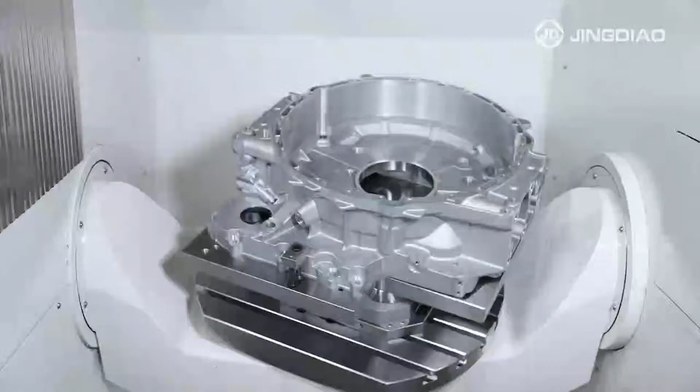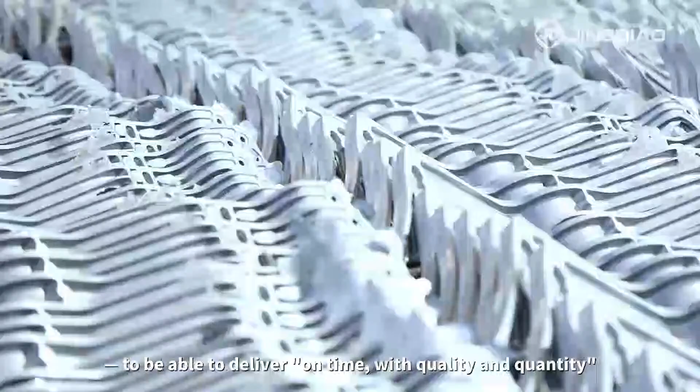As a manufacturing enterprise, Beijing Jingdiao is not an exception. Over the past 30 years since its establishment, it has always insisted that product development should return to the original position of a machine tool, a tool used for machining parts, and that it should focus on the original needs of customers, to be able to deliver on time, with quality and quantity. By providing customers with high-precision CNC machine tools and comprehensive CNC engineering services, it promotes the better development of both customers and the whole industry.

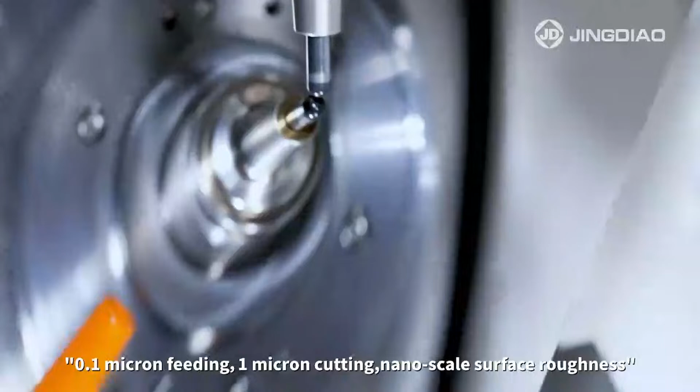Jingdiao precision CNC machine tools can stably achieve 0.1 micron feeding, 1 micron cutting, nanoscale surface roughness, to meet the needs of micron-level precision parts processing. Jingdiao CNC engineering services are based on Jingdiao's unique in-machine automation working mode, and provide mature CNC engineering solutions according to the needs of customers inside the industry.

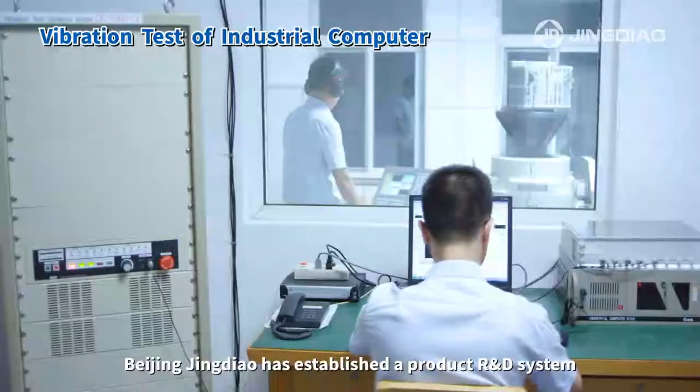In order to achieve the above goals, over the past 3 decades, Beijing Jingdiao has established a product R&D system that is close to the needs of customers, independently completing the R&D of key core components and core technologies of machine tools, and realizing the integration of electromechanical software.

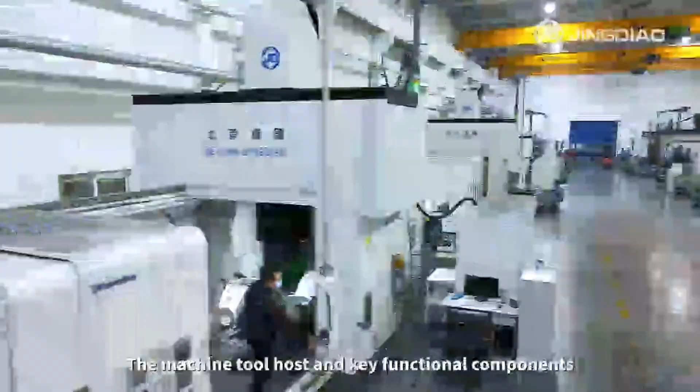A large-scale production system with lean manufacturing capabilities has been established, with a precision CNC machine tool production base of over 500,000 square meters. The machine tool host and key functional components are produced by self-developed equipment, with manufacturing and assembly accuracy controlled at the micron level.

We have helped customers make good use of the application technology service system of Jingdiao machines, established a technical service team of over 1,200 people, and provided professional, timely, and efficient technical services to customers at home and abroad.

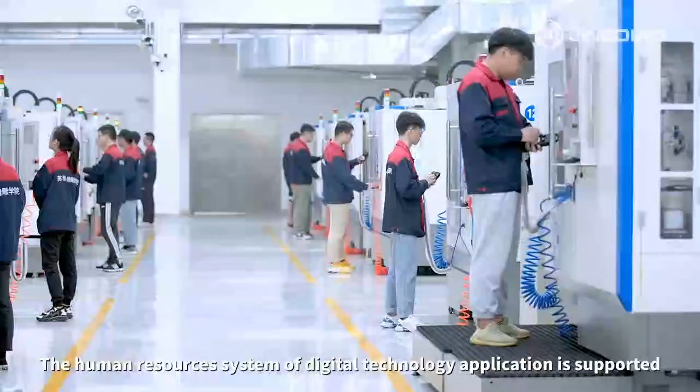The human resources system of digital technology application is supported, and accumulated over 20,000 talents who master digital technology to the industry through independent education, school enterprise cooperation, and hosting industry competitions.

Nowadays, Jingdiao high-speed machining centers have achieved large-scale application in the Chinese machining industry, helping manufacturing enterprises truly achieve micrometer-level parts large-scale and efficient processing.

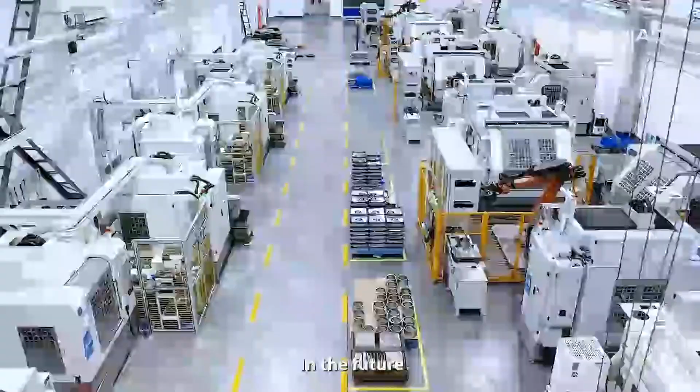Mountains and seas are not really barriers for sincere cooperation. In the future, we hope to work together with our European manufacturing partners to contribute our share to the development of the industry.

Let's connect the world with precision machining. Join hands to create a brand new future.

Connecting the world with precision machining.

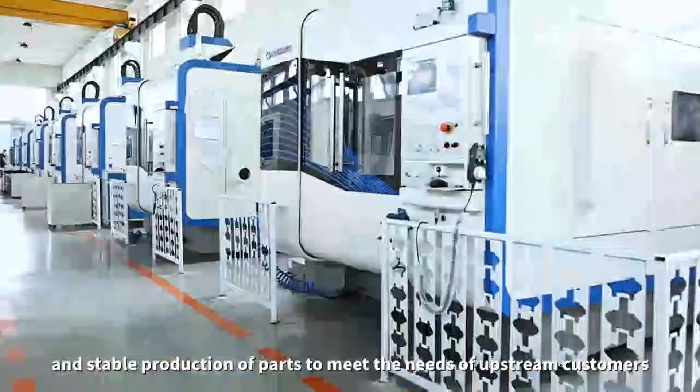In every aspect of our daily lives, products of all kinds continue to improve the quality of life. And these products are made up of parts, and parts cannot be created without the manufacturing industry. Many companies in the manufacturing industry have been working tirelessly to ensure the accurate, efficient, and stable production of parts to meet the needs of upstream customers, maintain supply chain stability and ensure product performance and quality.

As a manufacturing enterprise, Beijing Jingdiao is not an exception. Over the past 30 years since its establishment, it has always insisted that product development should return to the original position of a machine tool, a tool used for machining parts, and that it should focus on the original needs of customers, to be able to deliver on time, with quality and quantity. By providing customers with high-precision CNC machine tools and comprehensive CNC engineering services, it promotes the better development of both customers and the whole industry.

Jingdiao precision CNC machine tools can stably achieve 0.1 micron feeding, 1 micron cutting, nanoscale surface roughness, to meet the needs of micron-level precision parts processing. Jingdiao CNC engineering services are based on Jingdiao's unique in-machine automation working mode, and provide mature CNC engineering solutions according to the needs of customers inside the industry.

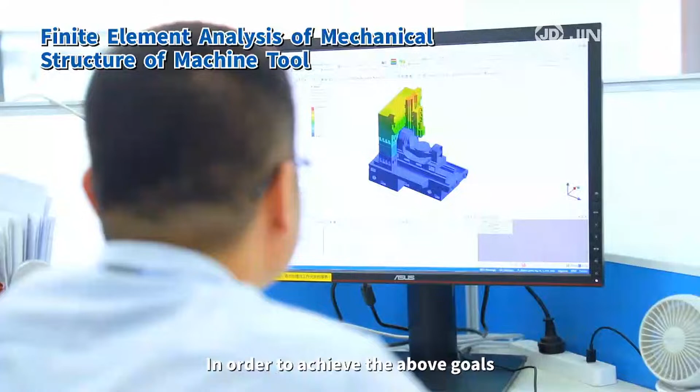In order to achieve the above goals, over the past 3 decades, Beijing Jingdiao has established a product R&D system that is close to the needs of customers, independently completing the R&D of key core components and core technologies of machine tools, and realizing the integration of electromechanical software.

A large-scale production system with lean manufacturing capabilities has been established, with a precision CNC machine tool production base of over 500,000 square meters. The machine tool host and key functional components are produced by self-developed equipment, with manufacturing and assembly accuracy controlled at the micron level.

We have helped customers make good use of the application technology service system of Jingdiao machines, established a technical service team of over 1,200 people, and provided professional, timely, and efficient technical services to customers at home and abroad.

The human resources system of digital technology application is supported, and accumulated over 20,000 talents who master digital technology to the industry through independent education, school enterprise cooperation, and hosting industry competitions.

Nowadays, Jingdiao high-speed machining centers have achieved large-scale application in the Chinese machining industry, helping manufacturing enterprises truly achieve micrometer-level parts large-scale and efficient processing. Mountains and seas are not really barriers for sincere cooperation. In the future, we hope to work together with our European manufacturing partners to contribute our share to the development of the industry.

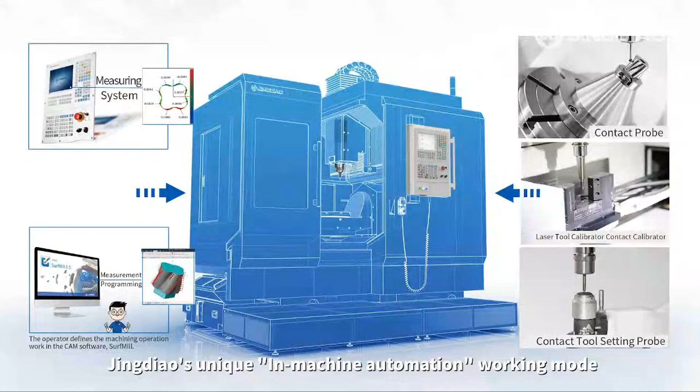Jingdiao precision CNC machine tools can stably achieve 0.1 micron feeding, 1 micron cutting, nanoscale surface roughness, to meet the needs of micron-level precision parts processing. Jingdiao CNC engineering services are based on Jingdiao's unique in-machine automation working mode and provide mature CNC engineering solutions according to the needs of customers inside the industry.

In order to achieve the above goals, over the past 3 decades, Beijing Jingdiao has established a product R&D system that is close to the needs of customers, independently completing the R&D of key core components and core technologies of machine tools, and realizing the integration of electromechanical software.

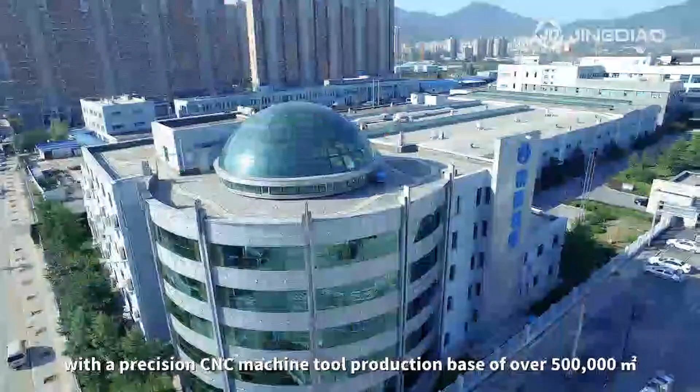A large-scale production system with lean manufacturing capabilities has been established, with a precision CNC machine tool production base of over 500,000 square meters. The machine tool host and key functional components are produced by self-developed equipment, with manufacturing and assembly accuracy controlled at the micron level.

We have helped customers make good use of the application technology service system of Jingdiao machines, established a technical service team of over 1,200 people, and provided professional, timely, and efficient technical services to customers at home and abroad.

The human resources system of digital technology application is supported, and we have accumulated over 20,000 talents who master digital technology for the industry through independent education, school enterprise cooperation, and hosting industry competitions.

Nowadays, Jingdiao high-speed machining centers have achieved large-scale application in the Chinese machining industry, helping manufacturing enterprises.

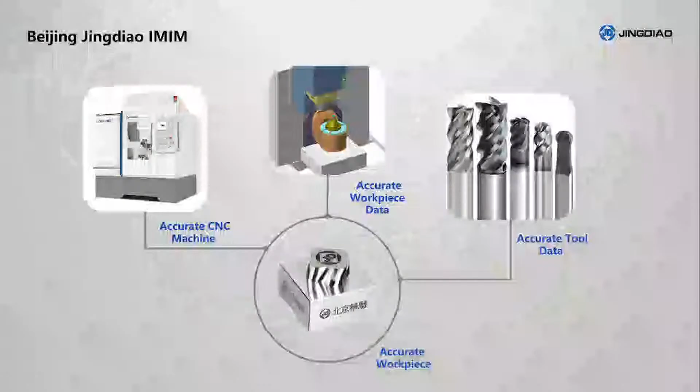In order to machine such high precision parts, especially as we saw, these micron parts are standardized machined. To some extent, we need a high precision CNC machine tool, of course, and then we also need to make sure that the workpiece and the cutting tools are all accurate, as well as the whole process.

However, there are many factors that may lead to the accuracy going out of tolerance, such as workpiece deviation, inaccurate raw part allowance, and tool size deviation and tool wear.

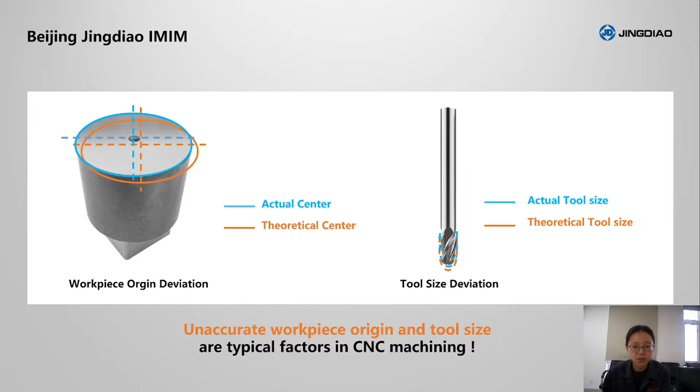Among all these factors, workpiece origin deviation and tool size deviation are so common yet have such obvious influence on the machining results.

To eliminate the deviation, we usually use the following methods. For example, we use a dial indicator to align the part, or some machines provide MDI functions to set the origin, usually for simple shapes such as rectangular and circle. We may also use trial cut to set the tool. Some machines provide MDI functions to set the length or radius of the cutting tools, but not the profile of the cutting tool.

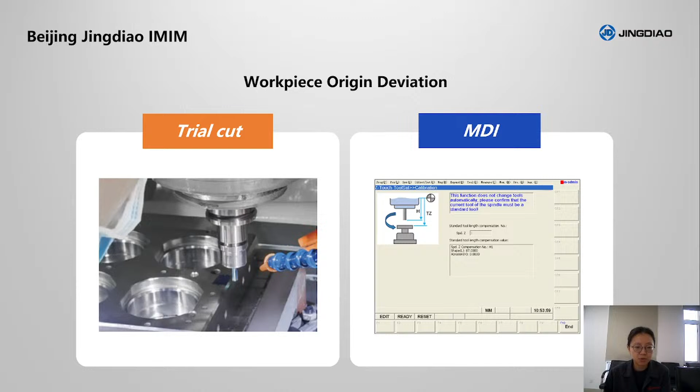So is there a possible solution that we can obtain the data of workpiece and tools fast, accurately, intelligently, automatically, and compensate the deviation intelligently in not only 3-axis machine tools, but also 5-axis?

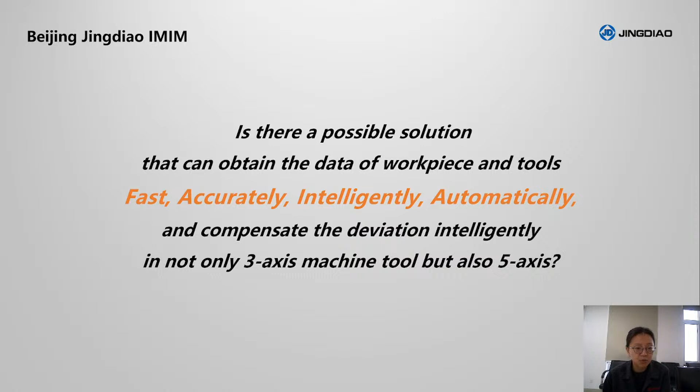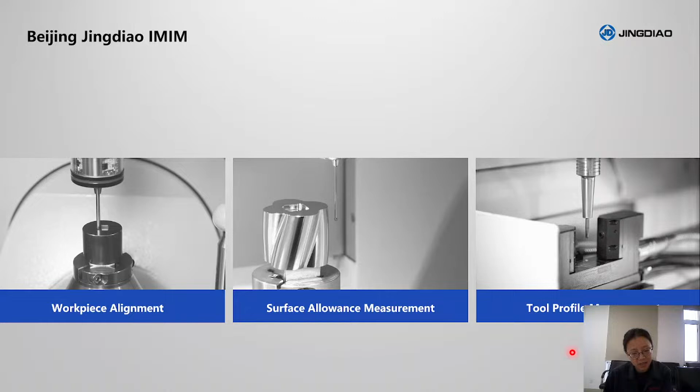The parts we saw in the video at the beginning of our online seminar used IMIM to set the origin automatically and measure the surface allowance and compensate the ball end cutting tool profile intelligently. Besides this part, Jingdiao IMIM is widely used in machining all kinds of parts. Today, I will use several examples to explain what we can do with IMIM in precision machining.

So first, let's see what IMIM can do in building precise coordinate parts in 3-axis machining and 5-axis machining, especially for complex and irregular shaped parts.

When processing parts, the first work is to define the workpiece coordinate system based on the blank part. Sometimes the blank part has a regular shape benchmark, such as what we can see in this picture - rectangulars and circles. But sometimes the blank parts are irregular and have polygons, ellipses, and special shaped borders, such as this part. In this situation, it's not easy to align parts based on these irregular features, especially with manual operation.

Let's take this part as an example. This is a CAM part. The border surface in green is to be machined. The original method the customer used was to align the fixture manually and then use these 2 cylinders to fix the part and make sure the part is accurately fixed. In this method, there are 2 errors: the manual alignment introduces error to the clamping accuracy, and the tolerance between holes and cylinders is another error.

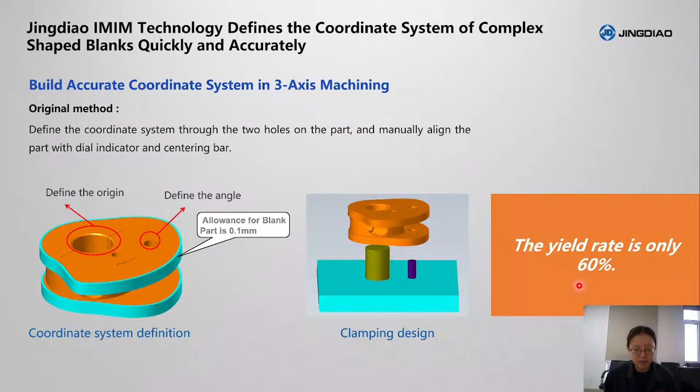Using this method to align the part can only get a 60% yield rate, which is not the best. That's the reason why the customer asked Jingdiao to help them solve this problem.

So Jingdiao's solution is to adjust the data in the control system instead of adjusting the parts. There needs to be no manual operation on the machine side, because the measuring program is finished in Jingdiao CAM software and the measuring, the calculation, the compensation are done by Jingdiao CNC system. By using the Jingdiao method, the contour machining accuracy of this feature can be controlled within 10 microns, and the yield rate increased to 99%.

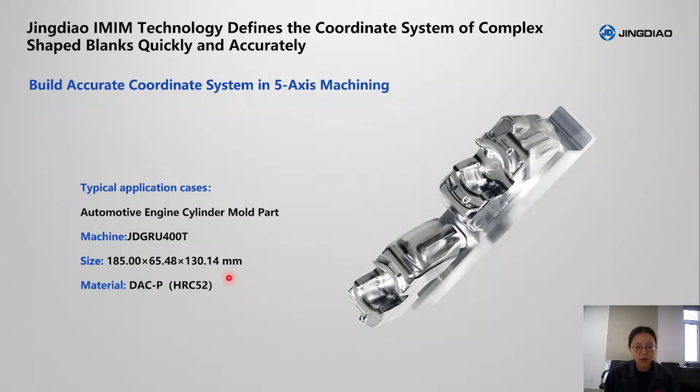Because of the irregular shape of this part, when the workpiece is clamped on a 5-axis machine tool, the MDI method or manual alignment cannot accurately compensate the spatial angle deviation of the workpiece.

This is how we can set the coordinate system of this part with IMIM. We use Jingdiao CAM software SurfMill to program the in-machine measurement and intelligent compensation program of workpiece position so that we can compensate the deviation in the Z-axis, and also compensate the angle deviation in the A-axis and also in the B-axis.

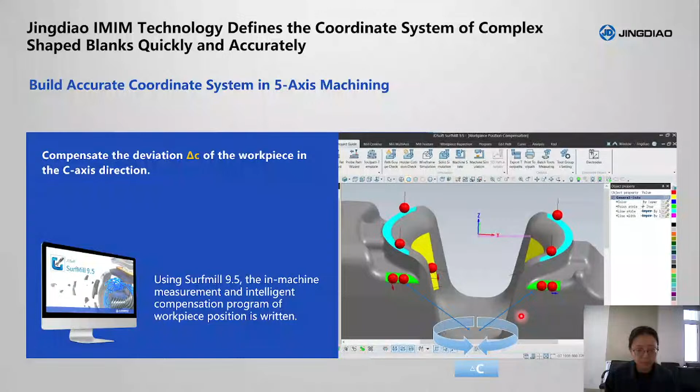This picture shows that we can compensate the deviation in C-axis and program the probing program in our CAM software as well. All these measurement programs are finished in our CAM software.

This is the interface in Jingdiao CAM software of selecting features to build the coordinate system, and then we can output the measurement path to the control system.

With Jingdiao IMIM, the Jingdiao high-speed machining centers will perform in-machine measurement programs and automatically calculate the deviation in X, Y, Z, A, B, C direction in the JD50 CNC system. The JD50 system will run the G54.4 code to compensate the deviation so that the coordinate system is built according to the actual clamping situation of the parts in the 5-axis machine tool.

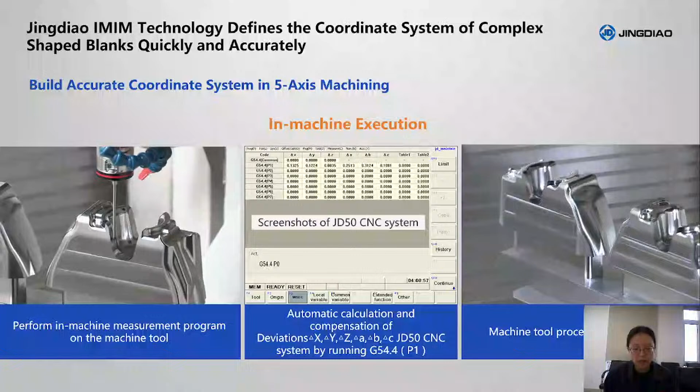Thus, in the following processes, the machining is accurate. Let's watch a video about the measurement process and also the following machining process.

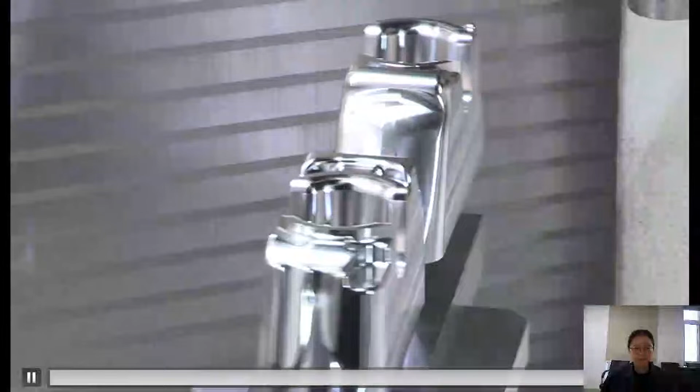When we are machining die casting parts or 3D printed parts with 5-axis machine tools, it will be even harder to set the coordinate, as there are hardly any regular features to manually align, and the accuracy of these blank parts is worse than those processed before.

However, with Jingdiao IMIM, we can also set a precise coordinate system for die casting parts and 3D printed parts. Here are 2 videos.

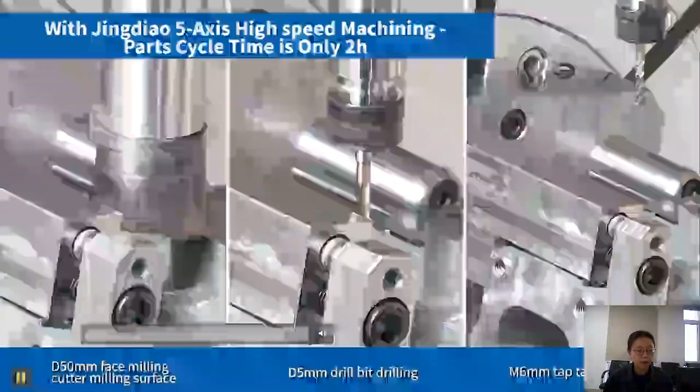In this video, we can see that if we don't use Jingdiao IM and instead use a manual alignment method to set the coordinate of this part, we will need a cycle time of up to around 20 hours, because the die casting part has no regular benchmark, so we need to first manually mark the parts and then use a manual method to align the part in order to find its right position.

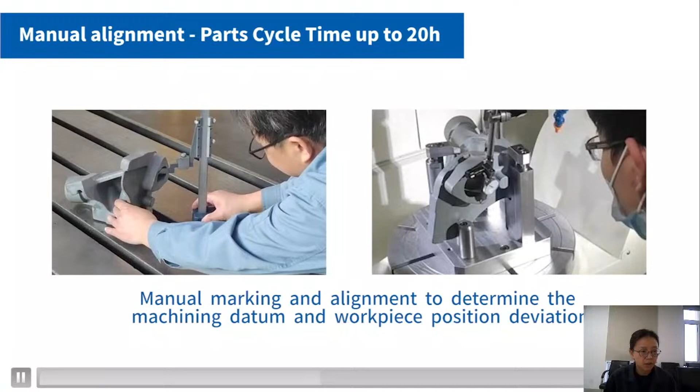But with Jingdiao IM, all we need to do is finish the measurement program in our CAM software, and then the machine will measure the part by itself, and the cycle time will be reduced dramatically.

With Jingdiao IM, we don't need any manual method or manual operation to align the part, and the cycle time will be reduced to 2 hours.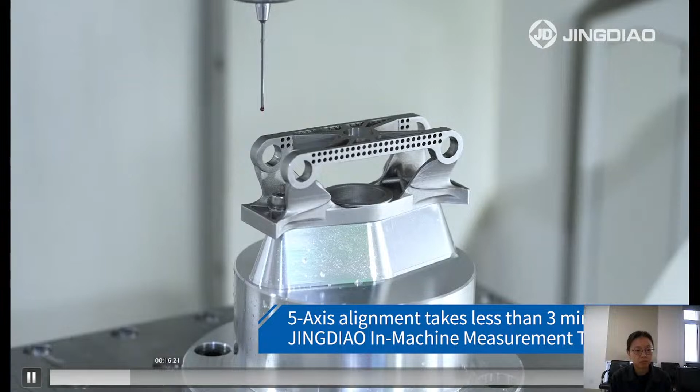With IMIM, the alignment time is less than 3 minutes.

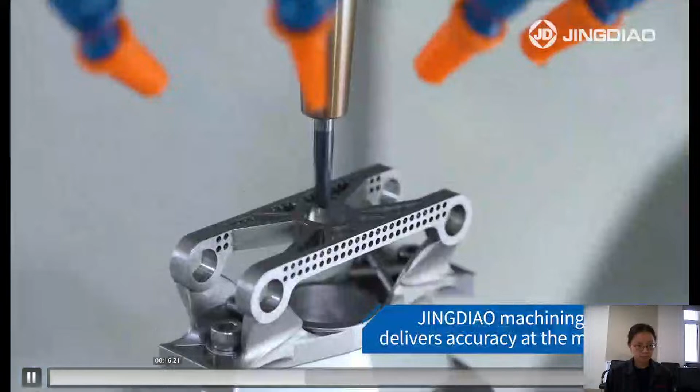After the part is finished, we can also do an in-machine measurement of the finished part to make sure that its accuracy is qualified.

As we can see in these videos, the probe is quite like a cutting tool that we just put in our tool magazine, and when measurement is needed, we just change to the probe and use it to get the data of the parts.

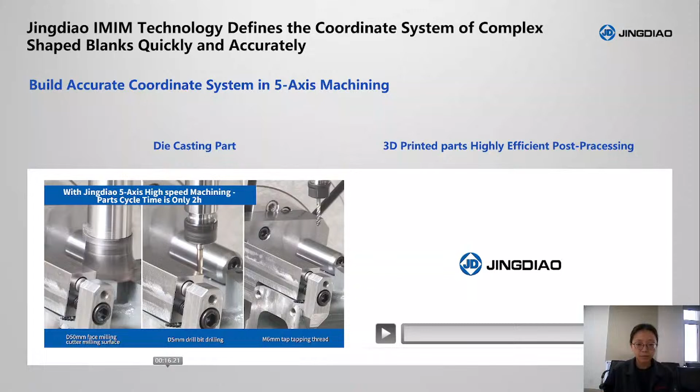At the end of this coordinate building part, let's watch a video. It's an experiment to demonstrate that with IMIM, we can align a workpiece without any manual operation, even when there is a very obvious deviation for the workpiece. Let's watch the video first.

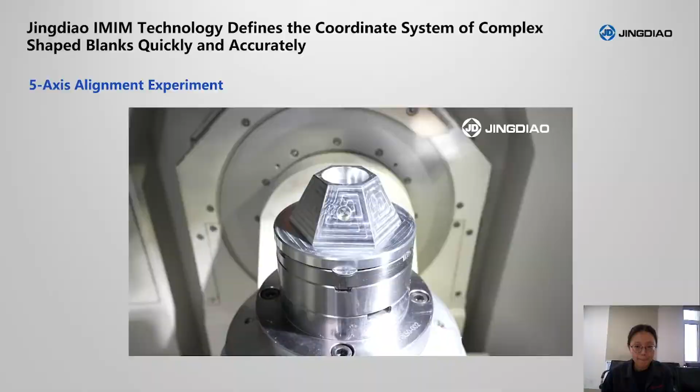After the coordinate system is built, we need to make sure the cutting tools we use are also accurate. This is the second aspect IMIM is applied to. We can use IMIM to do the cutting tools measurement and compensation.

As we all know, the use of in-machine tool measurement systems to detect tool errors has become the mainstream method in this industry. It's not new. The on-machine tool measurement system can basically realize the measurement and compensation of tool length and tool diameter, such as using contact tool setting to set the tool length, and laser tool setting instrument to set the diameter of tools, for example the flat end cutting tool and the ball end cutting tool.

But the difference is whether we can use this instrument to measure the tool profile and compensate, and why we need to measure the tool profile and compensate.

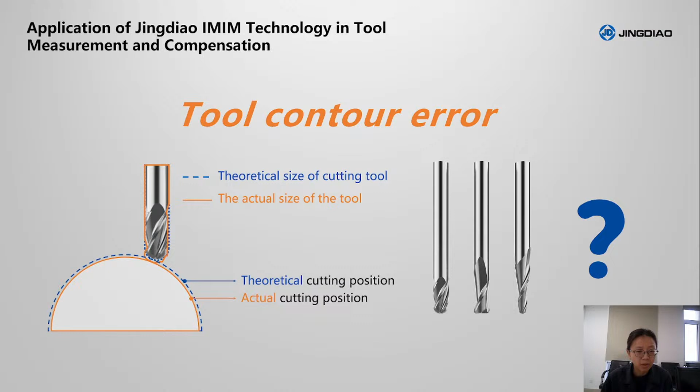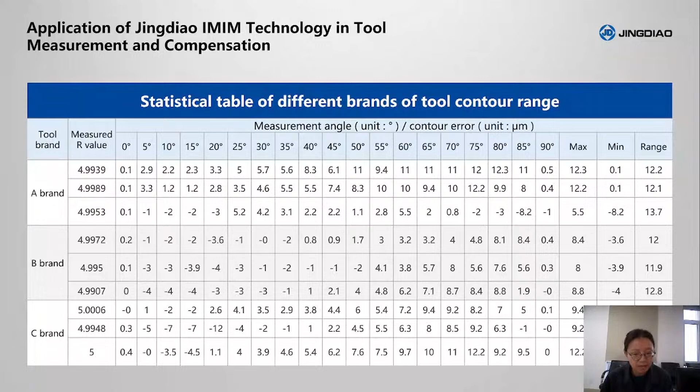Some of these cutters are Chinese brands, but some of them are really famous, worldwide famous cutting tool brands. As we can see from this chart, the contour range of these cutters can reach more than 20 micrometers. However, this is quite normal because cutters are manufactured, so there must be some errors. But if we don't compensate these errors, there will be a really negative influence on the machining results.

So the key to realizing the measurement and compensation of tool profile is still the combination between Jingdiao CAM software and Jingdiao control system. The output program generated in Jingdiao CAM software defines the process of tool measurement and tool compensation, and the laser tool setter collects the radius data of the cutter at different angles, like 5 degrees, 10 degrees, 15 degrees, etc. Then the Jingdiao control system will calculate this data and make the corresponding compensation to each angle, thus the precision can be improved dramatically for the parts.

This is also an example using IMIM to compensate the profile of a ball end cutter. With the IMIM, the minimum cutting tool we can use is 0.75 millimeter radius, so it's quite a small cutting tool. The reason why we can use such a small cutting tool to machine the part is that we can make sure the cutting tool is accurate and also the part is accurate. The tool mark of this part at the cornering part is only 8 micrometers.

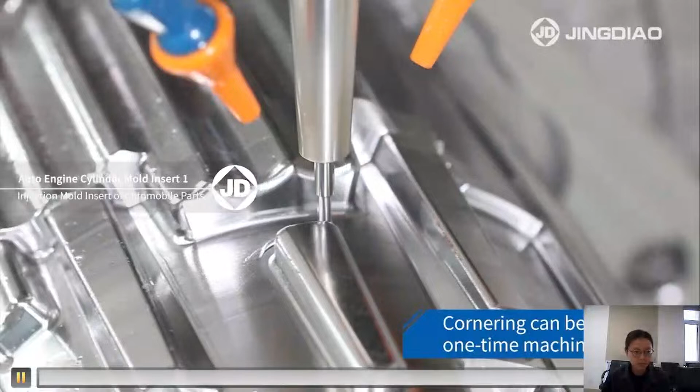Another very typical application of IMIM to measure and compensate the cutting tools we use is that in precision grinding, we can also measure the actual size of the grinding wheel and make compensation. The reason we do the measurement and compensation to the grinding wheel is that in precision grinding, the diameter of the grinding wheel also needs to be compensated.

In this kind of situation, we can use IMIM as well. We can measure the size of the grinding wheel directly and compensate. We can also measure the accuracy of these holes and calculate the data that needs to be compensated to the grinding wheel. This video shows this process very clearly. Let's watch this video.

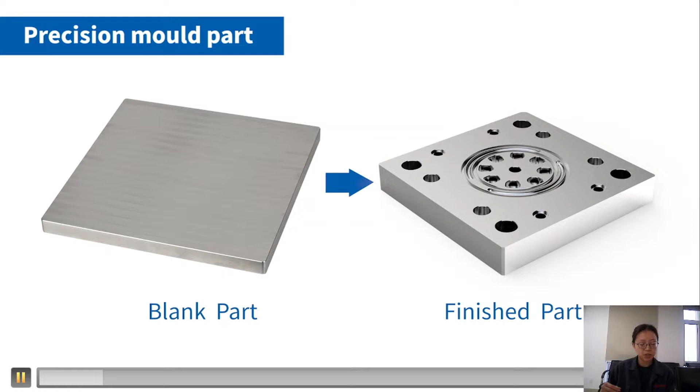We can see in this video that before using Jingdiao IMIM, the customer's machining mode required the operator to set the grinding wheel and also measure the hole accuracy after each process. So it needed a lot of time and a lot of operator experience when using this kind of machine. With this kind of machining mode, in 24 hours only 3 pieces of this kind of part could be produced.

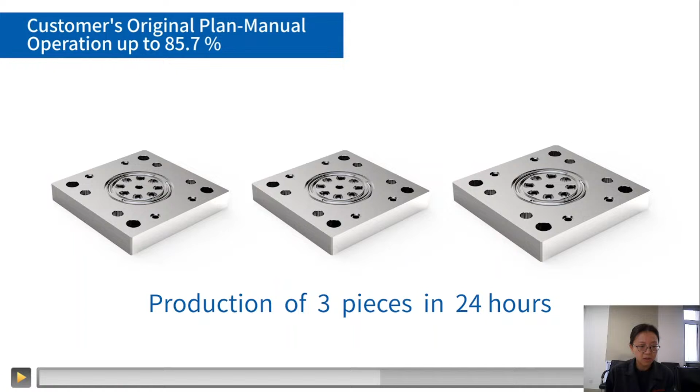With IMIM, as I mentioned before, we can measure the grinding wheel in-machine to get the grinding wheel size, and also measure the hole accuracy. We use the hole accuracy to calculate the data that needs to be compensated to the grinding wheel, so that efficiency is improved dramatically and accuracy is ensured.

With Jingdiao IMIM, and with this kind of machining mode, in 24 hours 2 more pieces can be produced. So before that there would be just 3 pieces, and after that we can have 2 more pieces per day.

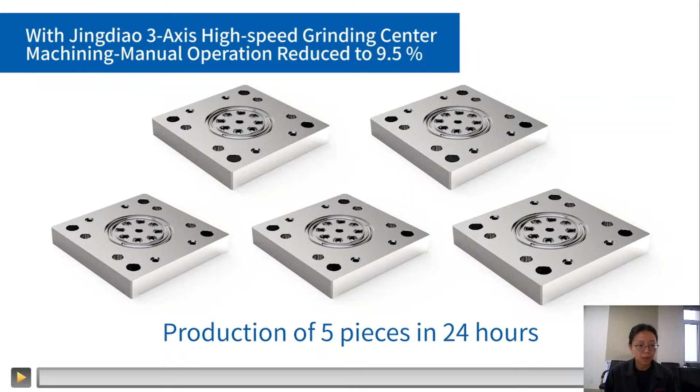Now we can start machining, as we have made sure the coordinate is correct, and we are using the actual data of cutting tools to machine as well. During machining with IM, we can also do something else.

For example, to realize shape-followed machining. This is also one typical application of IM, and as far as we know, this is an application that only Jingdiao can realize. So we will take egg engraving as an example to illustrate how it works.

The reason we take the egg as an example is that in batch production, each part is like an egg. There are no two same eggs in this world, so as the blank part, there will always be difference between two parts, though they are from the same batch production. And there will always be difference between the theoretical model of the part and the actual condition of the part.

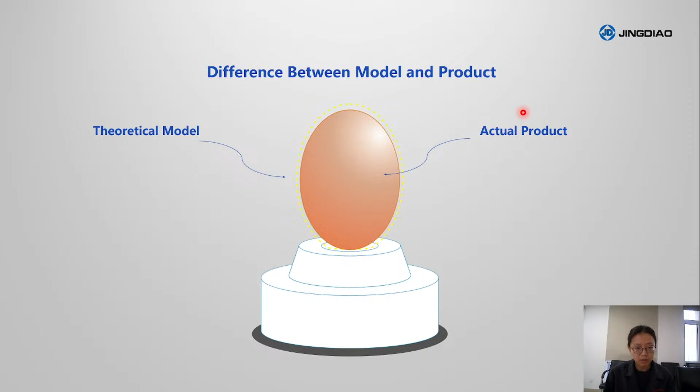So how do we get the same machining result when there is difference from one blank to another, though they have similar theoretical models and theoretical cutting paths? We can use IM to adjust the cutting path, and this is how it's realized.

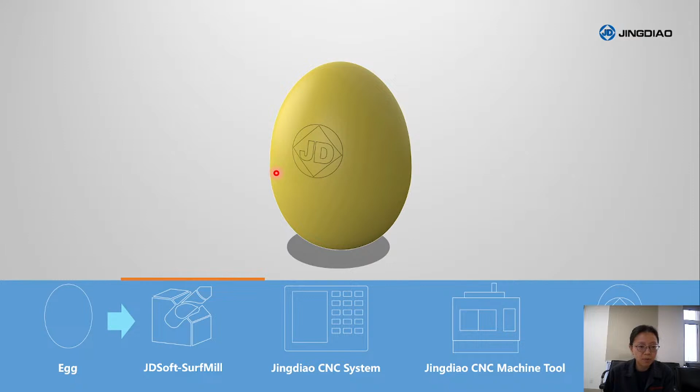As we can see on this slide, there is an egg. What we have to do first is build the egg model in our CAM software. This is the theoretical model of the egg. Then we set the probing points in the CAM software, and also set the probing path. After the path is finished, we output the path into the Jingdiao CNC system.

In the Jingdiao CNC system, it will read the NC program and run it automatically. All we need to do is press the start button to start the measurement process and also the machining process.

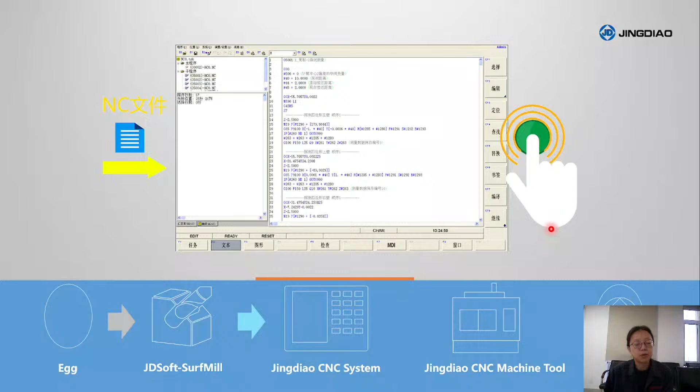In Jingdiao CNC machine tools, the probe will follow the probing path we generated in the CAM software, to probe the actual size or shape of each egg. Then we use this data to compensate, adjusting the theoretical cutting path into the actual cutting path in order to machine each egg.

And then we can get a perfect egg engraving. So I will show you a video of the whole process.

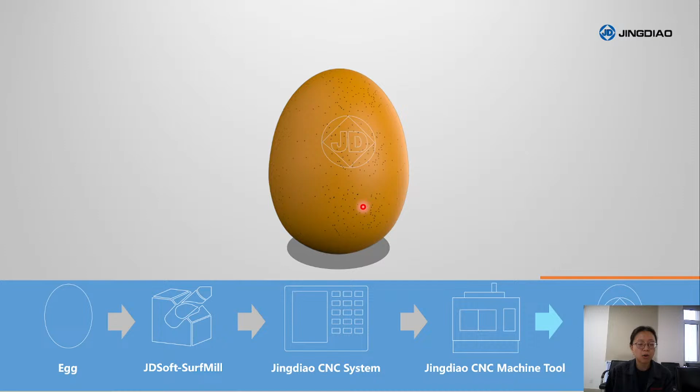There seems to be a small problem with the internet, so I will introduce these two slides again. What I just said is that the shape-followed machining application can also be used in other industries.

One of our customers used to machine wheel hubs. There are also chamfering features on the wheel hub, and we can use IMIM to do shape-followed machining to get an even chamfering size on the part.

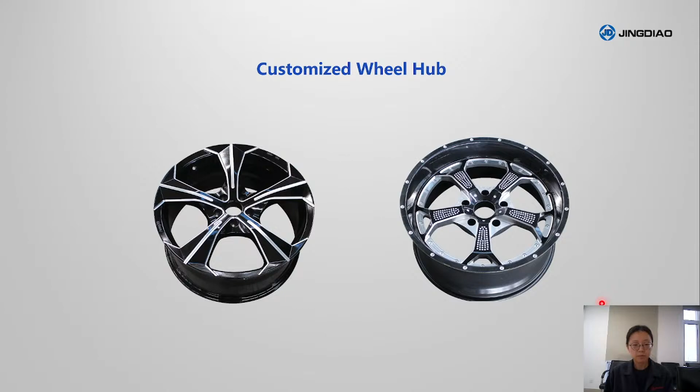So at the end of this application, I'd like to show you the whole process of the egg engraving case. Let's watch this video together.

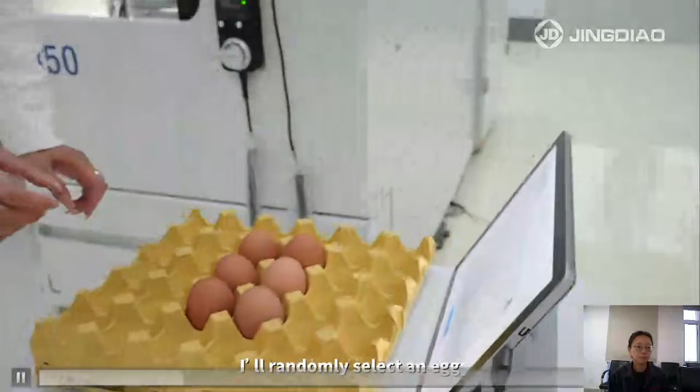These are eggs I just bought from the market. Today I want to engrave ASML on the surface of these eggs. First, I will write down ASML in the software and press this button to generate the NC program. Now the program is in the control system. I will randomly select an egg and clamp it in the machine tool.

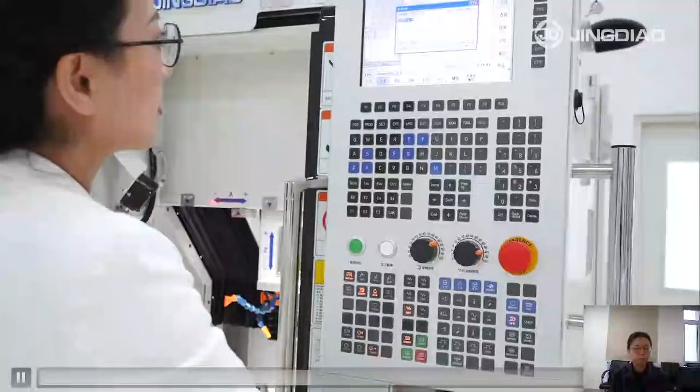Now I will open the NC program in the control system. Press the start button. Now let's wait a few minutes. The egg will be finished.

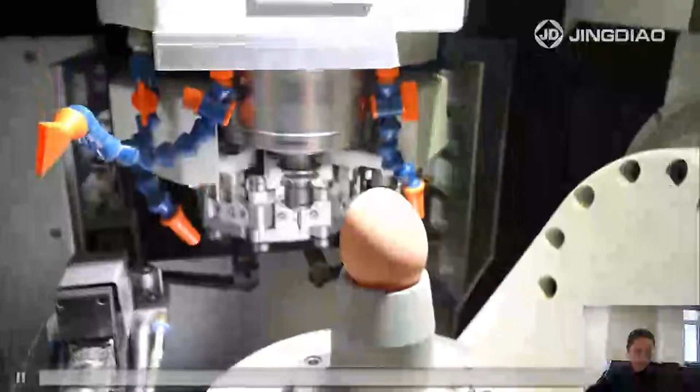Now the egg is finished. Let's see how it looks. ASML has already been engraved on the surface of this egg.

So in this video we see the whole process of how it works. First, I just wrote some letters in our software, and the software will generate the program automatically. Then the machine will use the probe to get the actual data of the egg I just put into the machine. I collected the egg randomly, I didn't pick one specific egg, I just picked a random egg because I want to show that.

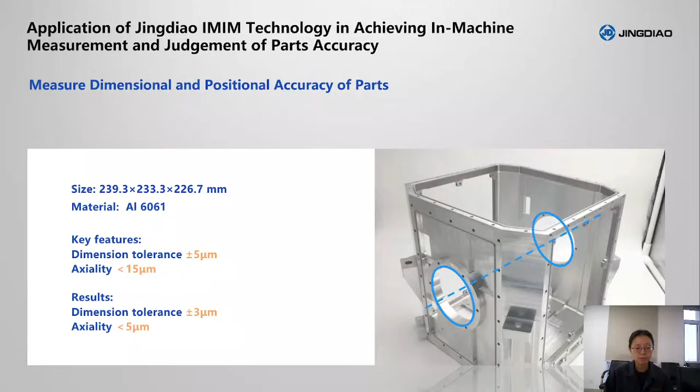So how can we do the in-process quality control or in-process dimensional accuracy measurement with IMIM? During the process, if you want to make sure some key features are qualified, we can use in-process quality control with IMIM. For example, the distance tolerance from left circle to right circle is 5 micron, as we just mentioned. After machining, we can do the measuring and calculating automatically, and if the tolerance is smaller than 5 micron, the machine will go to the next process.

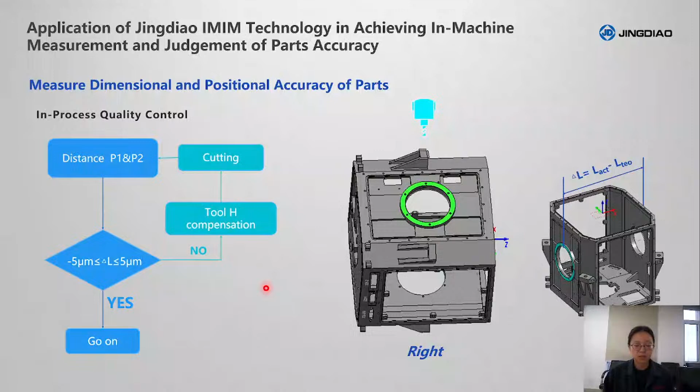As we saw in this picture, if it's qualified, if it's less than 5 micron, then it goes to the next process. But if it's not qualified, like this, the tool length compensation will be made intelligently according to the calculating result, and the feature will be processed until the tolerance is 5 micron.

So when the part is finished, instead of using a 3-coordinate measurement machine to do the finished quality control, we can measure the part in-machine for both simple shapes and complex dimensional and positional accuracy, such as the verticality, the axiality, and also the cylindricity of this part. This is the video showing how we do the finished part measurement.

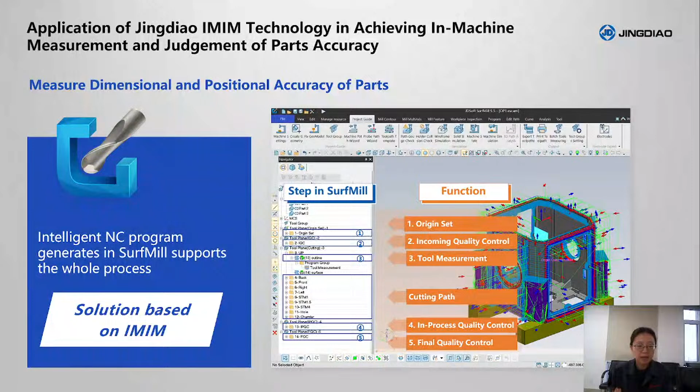All these machining and measuring processes are driven by the intelligent NC program generated in CAM software SurfMill. This program is what really matters, and also the G-code calculation and modification done in the control system, because this makes it possible that the operator only needs to load and unload the part, as all the machining, measuring and calculating work is done by the machine.

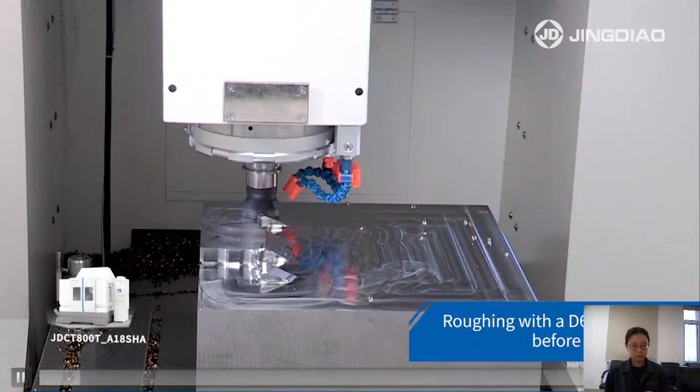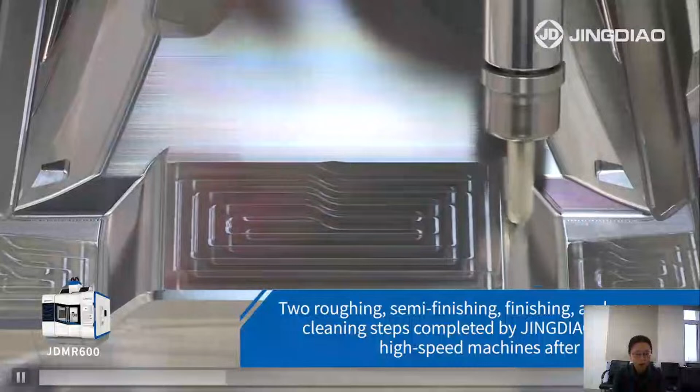So this is the whole process of how we machine this part. First, we use a Jingdiao 3-axis machine tool to do the roughing process. Then we clamp this part in our 5-axis machine tool to do the semi-finishing, finishing, and corner cleaning processes. Because there are really small features on this part, we need the 5-axis machine tool to reduce the length-radius ratio of the cutter in order to get better surface and accuracy quality.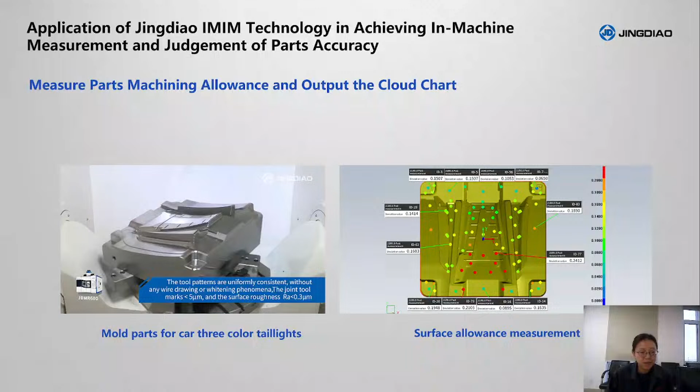So this is also a very special application for IMIM, and as far as we know, this kind of application can only be achieved by Jingdiao IMIM.

So with all these applications of IMIM I just introduced, the final goal we want to help our customers realize is automatic machining. This is how it works. With IMIM, we can use it to set the origin, as we saw in the first part of the video, and then we can compensate the tool error intelligently without any manual operation.

We can do the incoming quality control, in-process quality control, and also finished part quality control, so that no human-machine interaction is needed in the whole process besides part loading and unloading. This is what we call in-machine automation machining mode.

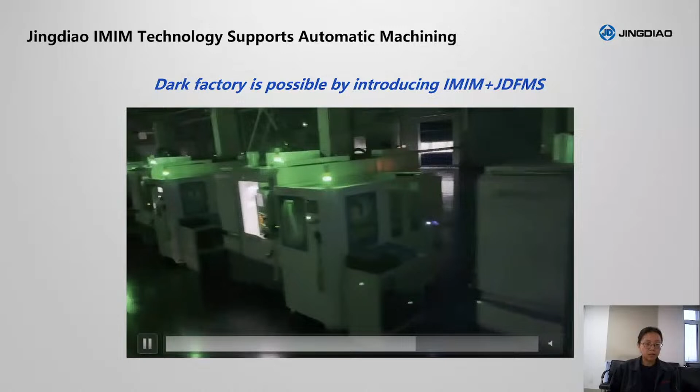So with in-machine automated machining mode supported by IMIM and JDFMS, dark factory is not a problem. This is a video from one of our customers' workshops. The machine can run 24 hours, and even at night the machine can still machine parts, so that our customers can sleep well at night and also enjoy life while the machines are running and making profits.

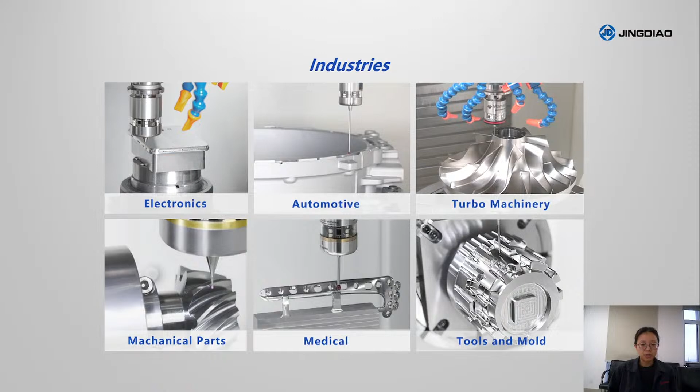Now, more and more customers from different industries are introducing IMIM and JDFMS to their factories. For example, we can see on this slide customers from the electronics, automotive, and medical industries. This technology can also be applied to different parts with different materials.

So from today's introduction, it's a comprehensive and thorough introduction of IMIM, what IMIM is capable of. From the very first beginning, IMIM can help our customers build a very accurate coordinate system. Then we can do tool measurement and compensation with IMIM, especially the tool profile, and we can also measure the grinding wheel and make compensation as well.

In real processing, we can use IMIM to realize shape-followed machining, which is very useful and helpful in batch production. Then we can do parts accuracy measurement, not only for simple shapes but for complex dimensional accuracy or positional accuracy. We can also measure the allowance of the surface as well.

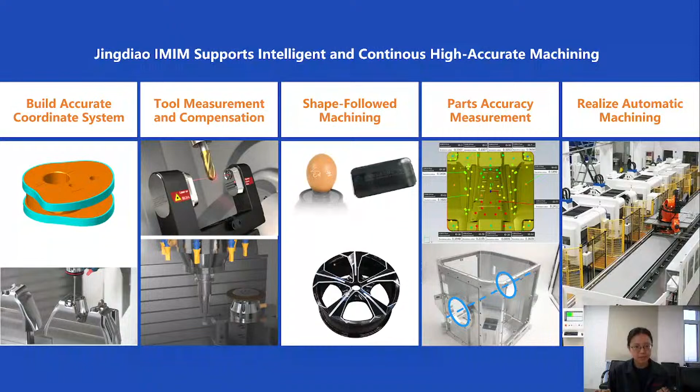In the end, we can realize automatic machining with IMIM, because manual operations in the whole process are replaced by the machine itself. So the machine can run continuously without any manual interference. Then we use JDFMS from Jingdiao to realize automatic loading and unloading work, so that the machine will run continuously 24 hours. This is how Jingdiao IMIM can support you to realize intelligent, continuous, and highly accurate machining.